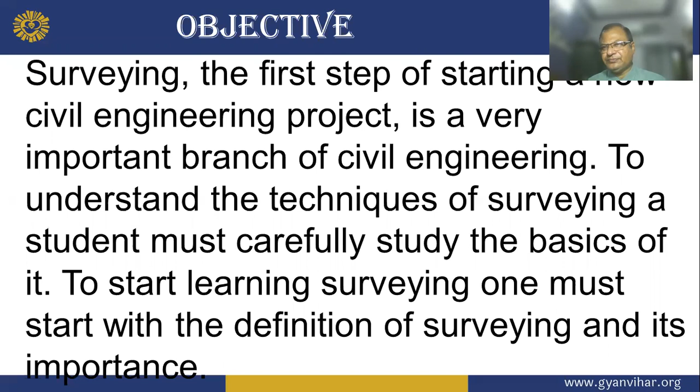Surveying is the technique of determining the relative position of different features on, above or beneath the surface of the earth, by means of direct and indirect measurement, and finally representing them on a sheet of paper known as plan or map. According to the American Congress on Surveying and Mapping,

surveying is a science and art of making all essential measurements to determine the relative position of points or physical and cultural details above, on, or beneath the surface of the earth and to depict them in usable form, or the establishment of the position of points of detail.

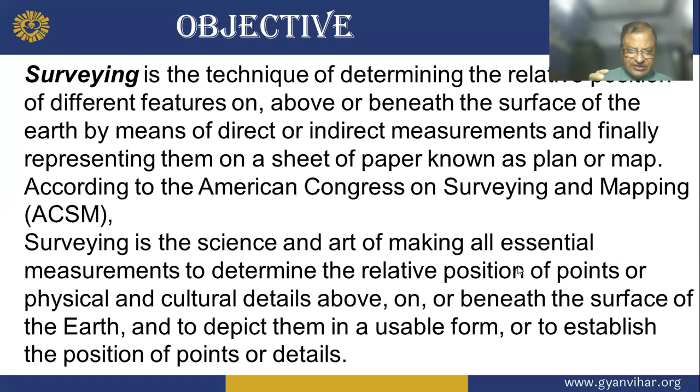The planning and design of all civil engineering projects, such as construction of highways, bridges, tunnels, dams, etc., are based upon surveying measurements. Moreover, during execution, projects of any magnitude are constructed along the lines and points established by surveying. Thus, surveying is the basic requirement for all civil engineering projects.

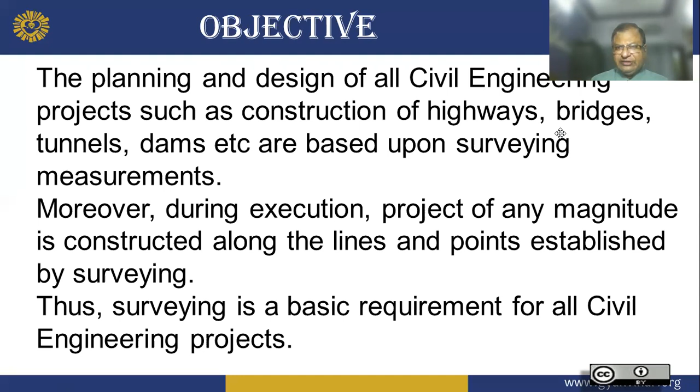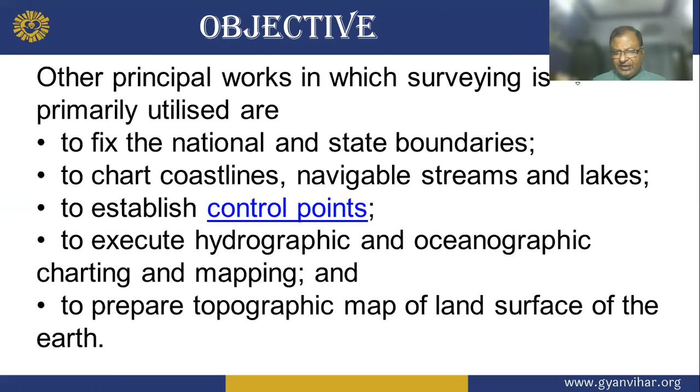Other principal work in which surveying is primarily utilized: to fix the national and state boundaries, to chart coastlines, navigable streams and lakes, to establish control points, to execute hydrographic and oceanographic charting and mapping, etc., and to prepare the topographic map of land and surface of the earth.

So dear boy, now we will see introduction of survey. First we will see the definition. Surveying is the science and art of the determination of the relative position of points above, on, or beneath the earth's surface and locating the points in the field.

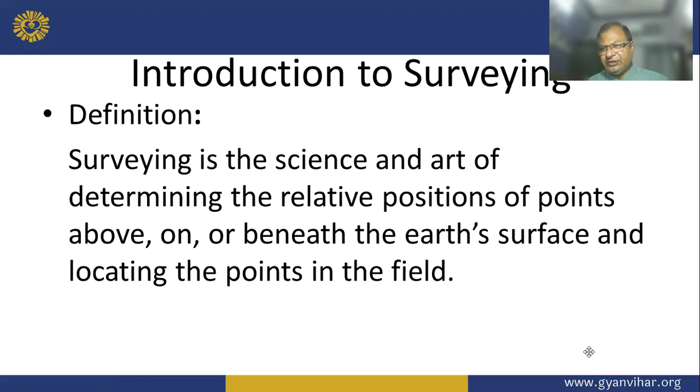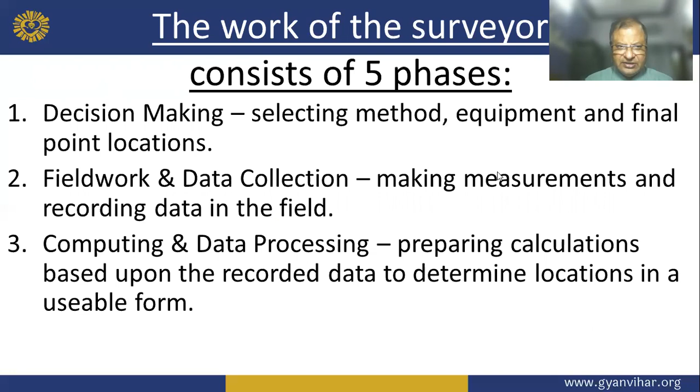The work of the surveyor consists of 5 phases: decision making, selecting method, equipment, and final point location; field work and data collection, making measurements and recording data in the field; computing and data processing, preparing calculations based upon the recorded data to determine location in a usable form.

The work of the surveyor consists of 5 phases. 4. Mapping or data representation, plotting data to produce a map, plot or chart of proper form, and stake out, locating and establishing monuments or stakes in the proper location in the field.

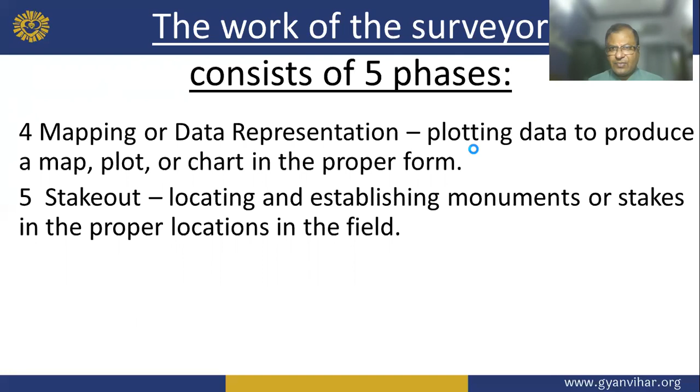So the primary object of the survey is the preparation of plan of estate or building, road, railway, pipeline, canal, etc., or to measure the field, state, nation. Object of a geodetic survey is to determine the precise position on the surface of the earth of widely distant points.

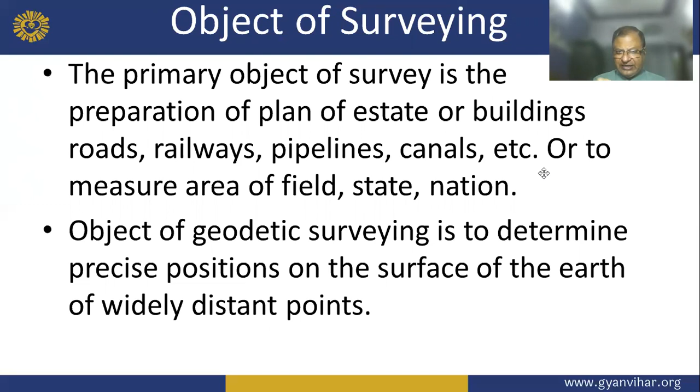To prepare a topographic map, this shows the hills, valleys, rivers, villages, towns, etc. of a country. To prepare a cadastral map showing the boundary of the fields, houses, and other properties. To prepare an engineering map to show details like road, railway, canal, etc.

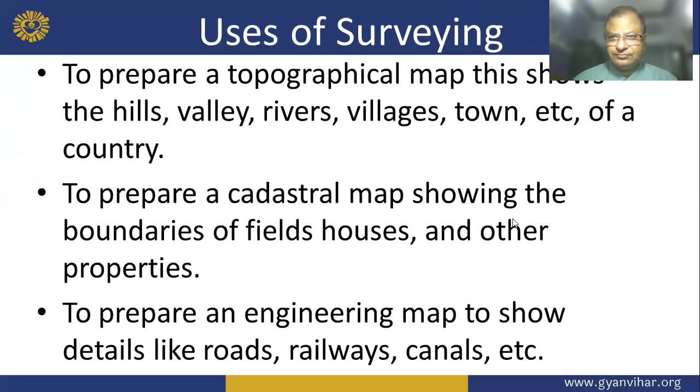Now, use of surveying to prepare military maps showing road and railway communication with different parts of the country. To prepare contour maps and determine the capacity of reservoirs and find the best possible route for roads and railways, etc. Now you will see what is the contour map and what is the reservoir map.

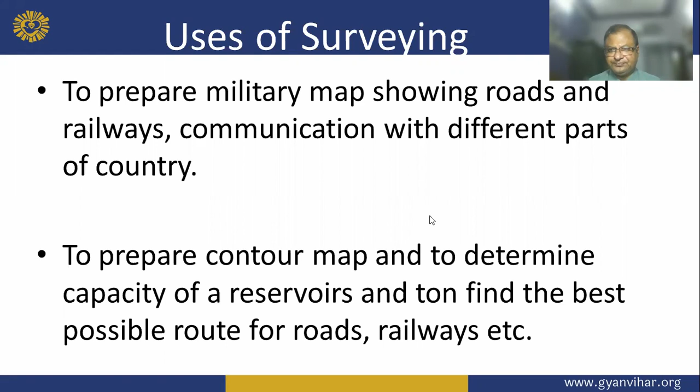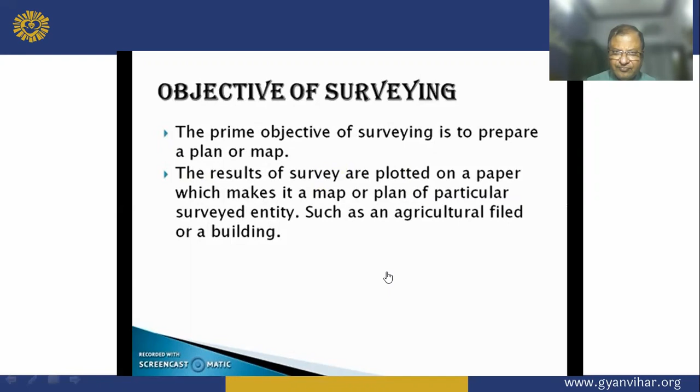Now, classification of survey. Survey may be classified in various ways: based on the nature of the field of survey, based on the objective of the survey, based on the method of survey, and based on the instrument used for survey. If you are making a field type survey - the farmer's field, the houses of farmers, the houses of a village - you can make it easily based on the objective of survey. If you want to plot all the objectives, you can show that. If you want to plan, it can be based on the method of survey, and based on the instrumentation used for survey, depending on which instrument you are using.

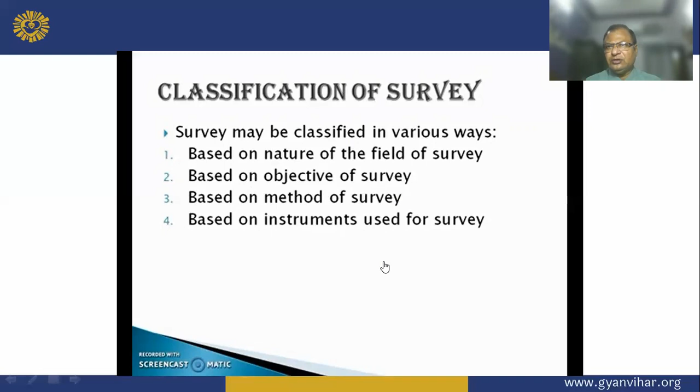Now, type of survey classification. First, the primary classification or primary division: plane survey and geodetic survey.

So what is plane survey? If here is an area, and in this area so many features are available - a river, a road, an entire road, and here is an important workshop - so all these are plane survey.

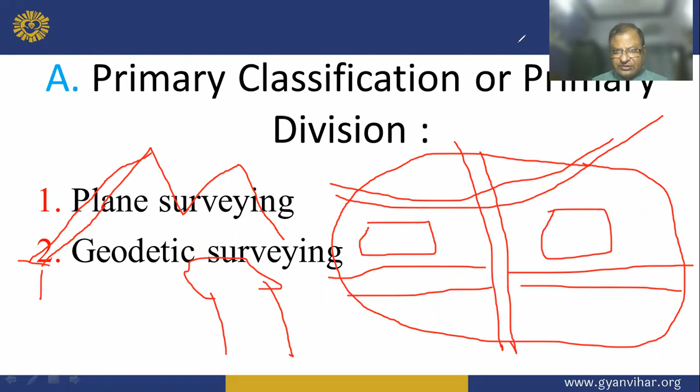But when you do a survey here, and here some mountains are available, here a tree is available, if you take one height from here and a second height from the top of the mountain, or one height from the bottom of the tree and a second from the top of the tree, this is called geodetic survey. It means where elevation has been entered in the survey, that is called geodetic survey.

So what is the definition? The shape of the earth is spherical, thus the surface is obviously curved. But in plane survey, the curvature of the earth is not taken into account. Just wait - my earth is like this. If you are doing a survey here, you cannot feel the earth is curved. If you do a survey of around 25 kilometers, then you will feel the earth has curved.

So the shape of the earth is spherical. The earth's surface is obviously curved, but in plane surveying the curvature of the earth is not taken into account. This is because plane surveying is carried out over a small area, so the surface of the earth is considered as a plane. The degree of accuracy required in this type of surveying is completely low. Plane surveying is done in areas of less than 250 square kilometers.

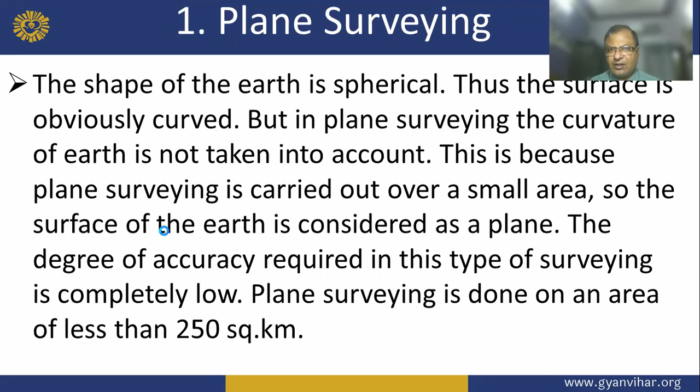In geodetic survey, the curvature of the earth is taken into consideration. It is extended over a large area, greater than 250 square kilometers. The line joining any two points is considered a curved line. Very refined methods and instruments are used in this type of surveying. In this method, very high precision and accuracy are required.

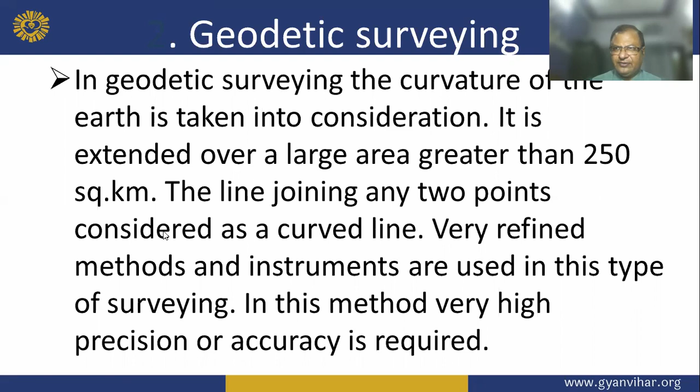In my previous class, you have seen how we are doing chain survey.

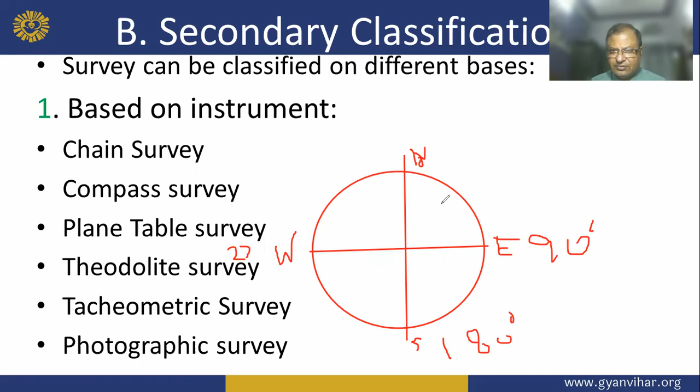Now, what is the plane table survey? If you are going in the field and you have work on a plane table, the entire work you do there is called plane table survey.

Theodolite survey is a version where you can take the horizontal axis, because a level can take only horizontal, but theodolite can take vertical survey too.

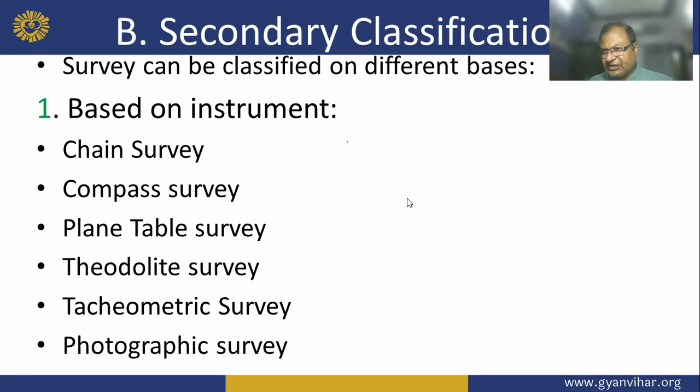So this is the photographic survey, that is the aerial survey. Triangulation survey and traverse survey. Geological survey, mine survey, archaeological survey, and military survey. Land survey, marine survey, astronomical survey.

Now, other types of survey are also available. Photogrammetry: mapping utilizing data obtained by the camera or other sensor carried by airplane or satellite. Boundary survey: establishment of property corners, boundaries, and area of the land parcels.

Control surveying: establishment of a network of horizontal and vertical monuments that serve as a reference framework for other survey projects. Or engineering survey: providing points and elevations for building and civil engineering projects.

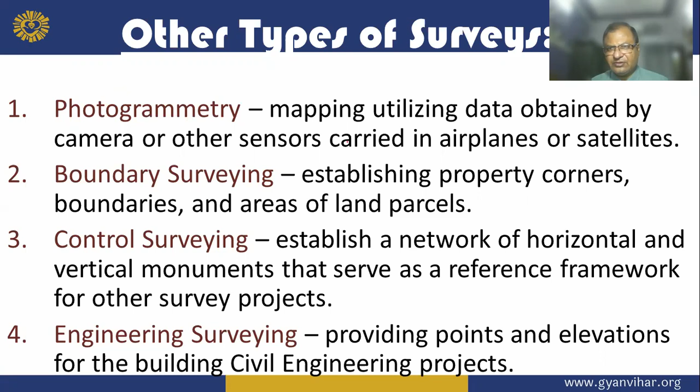So other type of survey: topographical survey, collecting data and preparing maps showing the location of natural and man-made features and elevation of points on the ground for multiple uses.

Route survey: topographical survey for long and narrow projects associated with civil engineering, such as highway, rail road, pipelines and transmission lines.

Hydrographic survey: mapping of the shoreline and bottom of a body of water, also known as bathymetric survey. The condition is, suppose this is the feature of earth, all filled with water. This is the sea. So all features you should survey and you will map the position of the earth's features, that is called hydrographic survey.

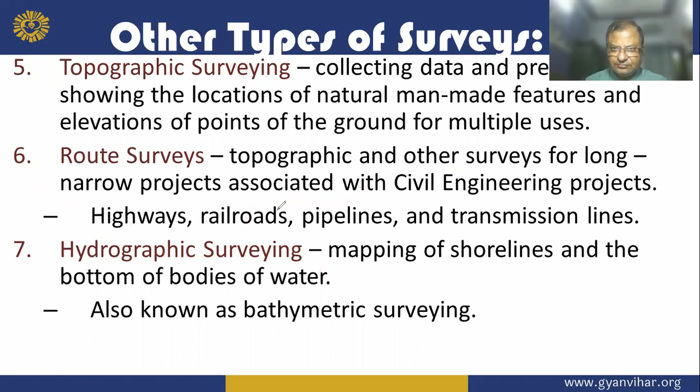Now, brief history of surveying. Surveying had its beginning in Egypt about 1400 BC.

Land along the Nile River was divided for taxation, and divisions were washed away by the annual floods. Rope stretchers, Egyptian surveyors, recreated and relocated the land divisions. Measurements were made with rope having knots as units of distance.

Extensive use of surveying in building Egyptian monuments, and Greek expansion of Egyptian work developed geometry. The pyramids are an example of this. They developed one of the earliest surveying instruments, the diopter, a form of level.

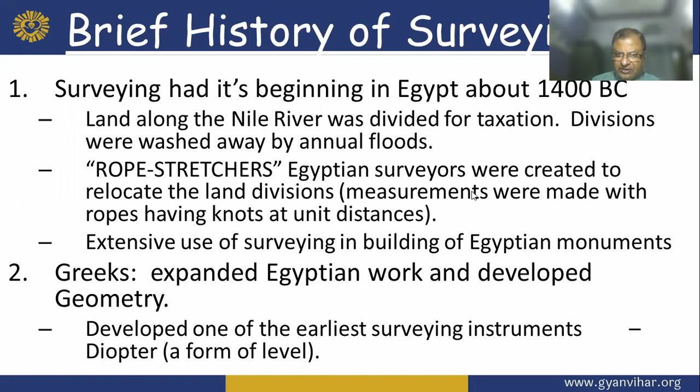The Romans developed surveying into a science to create Roman roads, aqueducts, and land division systems. So surveyors had great power, had a school and professional organization.

So they developed several instruments like the groma, a cross instrument used to determine a line at right angles, and the libella, an A frame with a plumb bob used for leveling, the chorobates, a 20-foot straight edge with oil in notches for leveling.

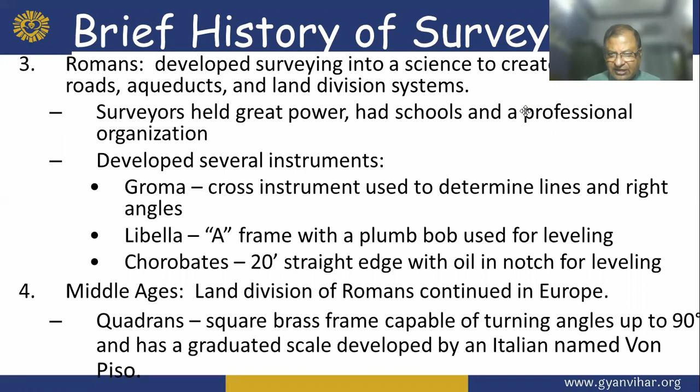Land division of the Romans continued in Europe, so the quadrans, a square brass frame capable of turning angles up to 90 degrees and having a graduated scale, was developed by an Italian named Von Piso.

So, brief history of surveying continued. My dear boy, in the 18th and 19th century in the New World, the need for mapping and marking land claims caused extensive surveying, especially by the English.

Now, in 1785, the United States began extensive survey of public land in one mile square sections. So 30 states surveyed under the US public lands survey, also called the rectangular system.

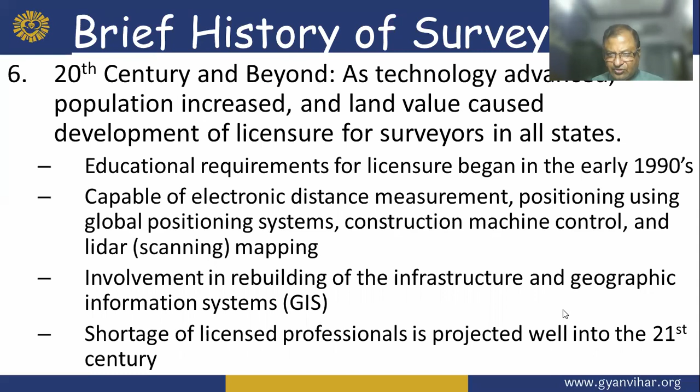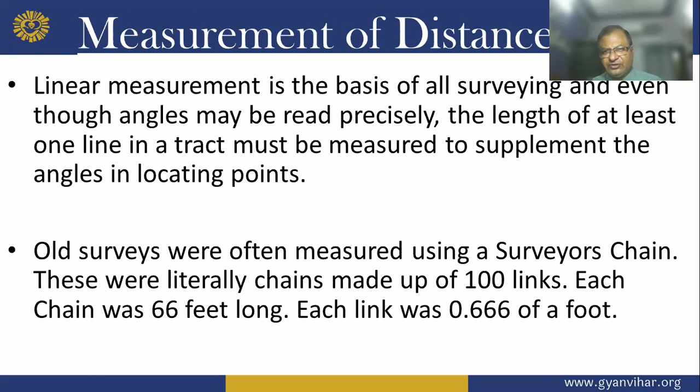Now, acre: the English acre is a unit of area equal to 43,560 square feet, or 10 square chains. A square mile is 640 acres. The Scottish acre is 1.27 English acres.

Chain: a unit of length usually understood to be the Gunter chain, formed of heavy metal chain of 100 links, that was used by surveyors to measure property.

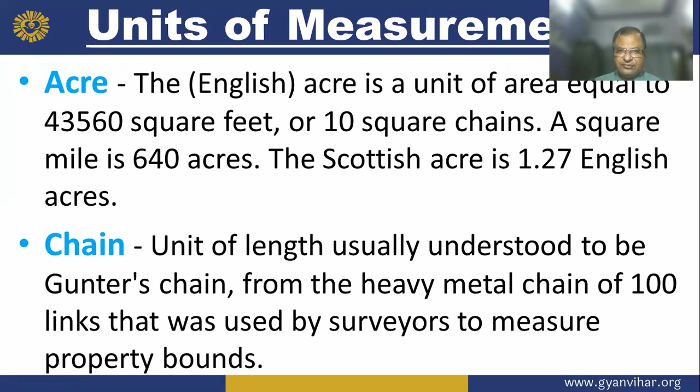Now, what is the hectare? A metric unit of area equal to 10,000 square meters, or 2.471 acres.

So link: a unit of length equal to 1/100 of a chain, so 7.92 inches. And rood: a unit of area usually equal to 1/4 acre.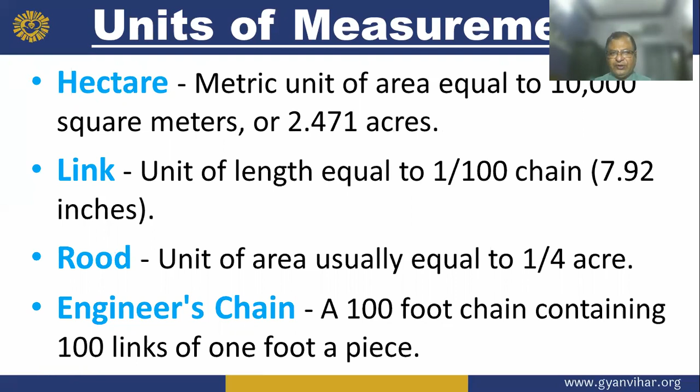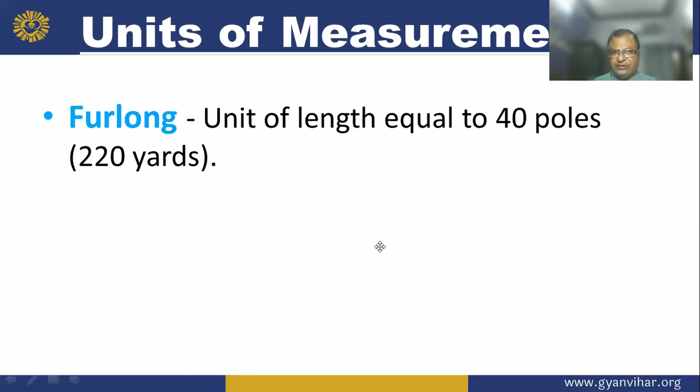Engineer chain: a 100-foot chain containing 100 links of 1 foot apiece. And this is the furlong, a unit of length equal to 40 poles, that is 220 yards, called a furlong.

A direct method of measurement, when a pupil moves around alone, that is called measurement of distance by pacing. Mainly it is counted as about 80 centimeters distance per pace of each person.

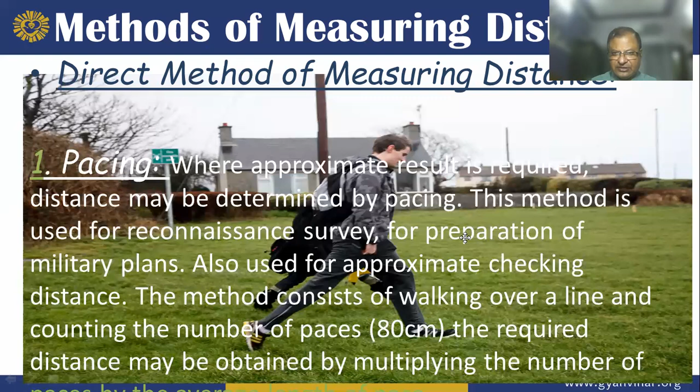So, method of measuring distance: the length of a pace varies with the individual's age, height and physical condition, the nature of the ground, uphill and downhill, the slope of the country, and the speed of pacing.

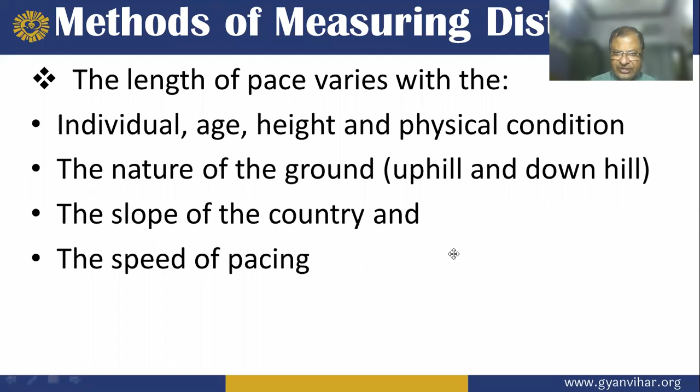This is the passometer. It is a pocket instrument. It automatically records the number of paces. It should be carried vertically in a waistcoat pocket or suspended from a button.

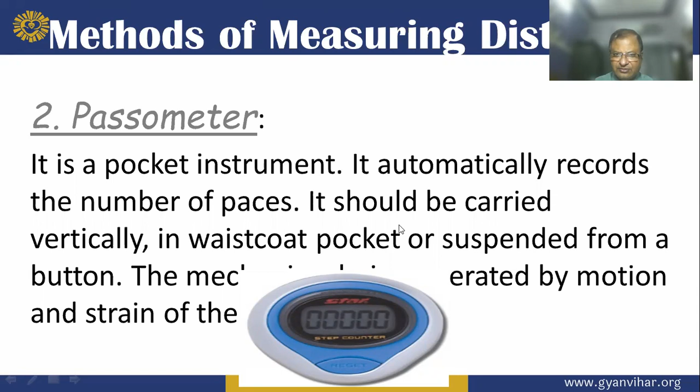It is operated by the motion and strain of the step. This is the pedometer. You can carry it at the waist or on the foot also.

It is similar to the passometer, but it registers the distance walked by the person carrying it. The distance is read by means of an indicator fitted with a stud or knob, which, when pressed, resets the indicator to zero. It may be carried in the same way as the passometer.

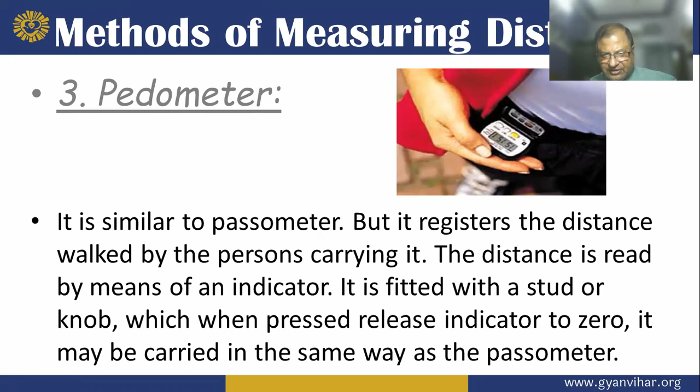This is also a measuring instrument, the car or motorcycle speedometer. From this, you can easily measure the distance and how much speed.

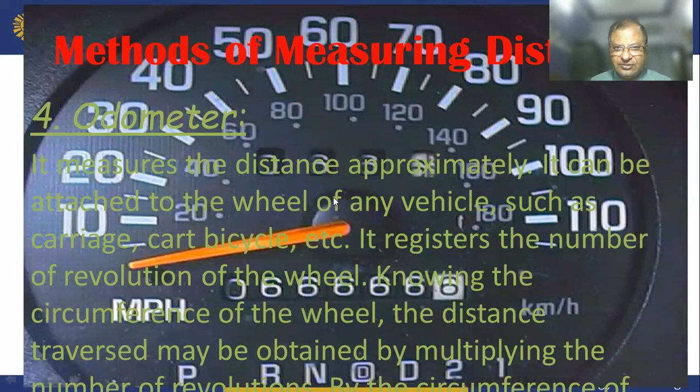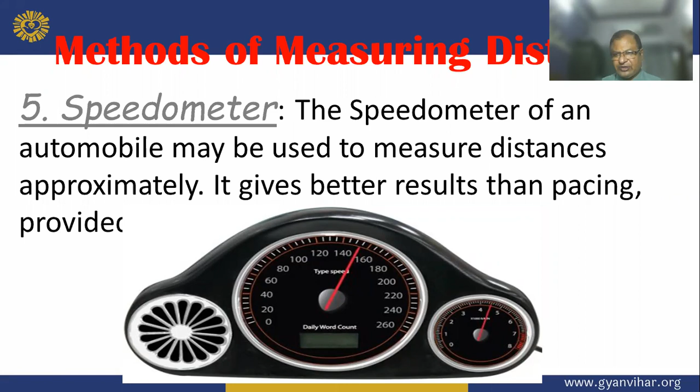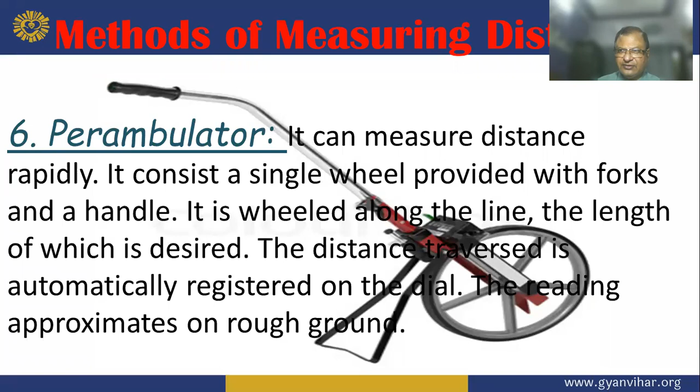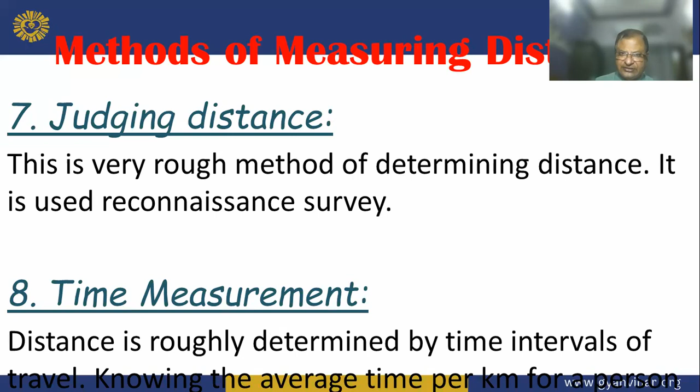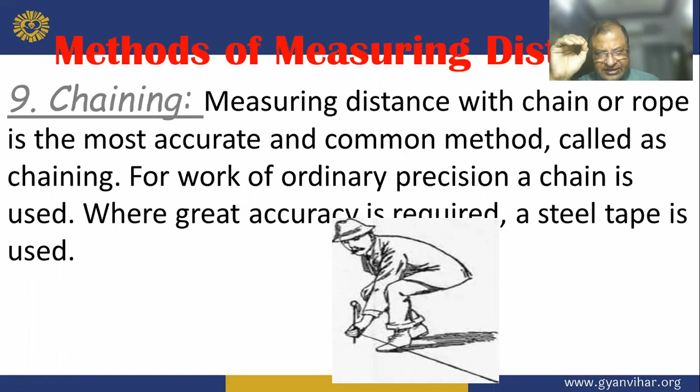Now, method of measuring distance: next, chaining, measuring distance with the chain or rope, the most common method, called chaining for work. If ordinary precision is needed, a chain is used; where great accuracy is required, a steel tape is used.

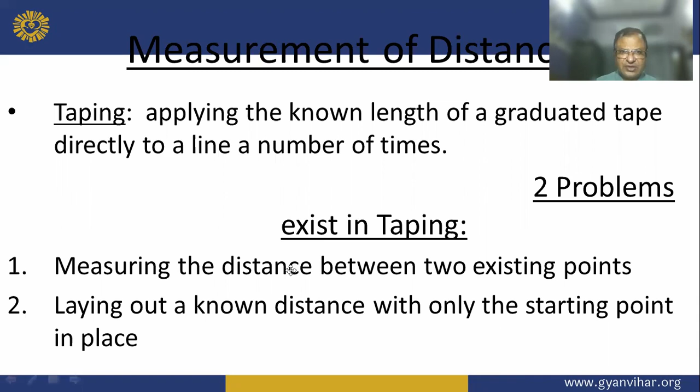The measuring of distance: now, taping, applying the known length of the graduated tape directly to a line a number of times, problems exist in taping, so measuring the distance between two existing points and laying out a known distance from the starting point. This is the measurement of distance.

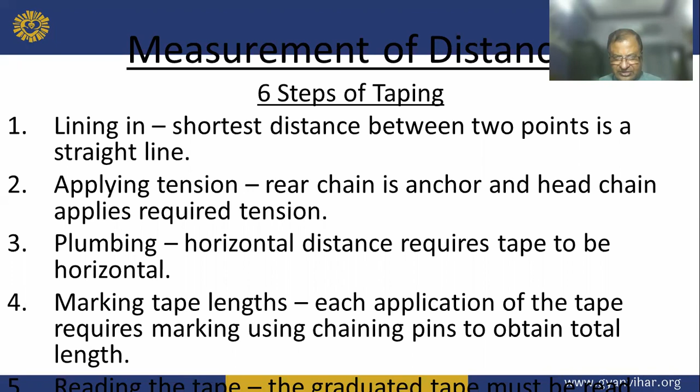So the steps of taping: first, lining in the shortest distance between two points is a straight line. Second, applying tension, with a rear chainman anchoring the lead chainman applying the required tension. Third, plumbing: horizontal distance requires the tape to be horizontal and marking the tape length. Each application of the tape requires marking, using chaining pins for the total length.

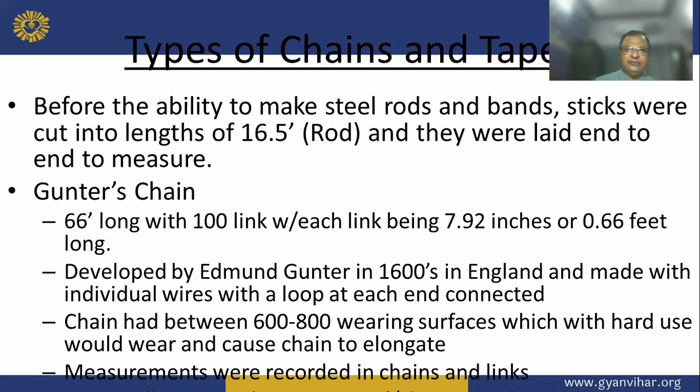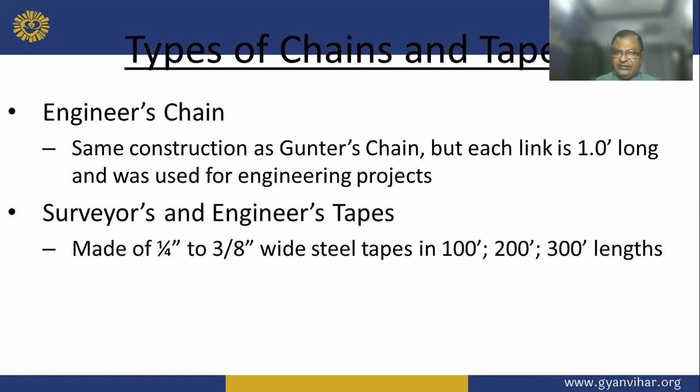Now, engineer's chain. Same construction as the Gunter chain, but each link is 1.0 foot long and it was used in engineering projects. Surveyor's and engineer's tape: made from 1/4 inch to 3/8 inch wide steel tape in 100 foot, 200 and 300 foot lengths.

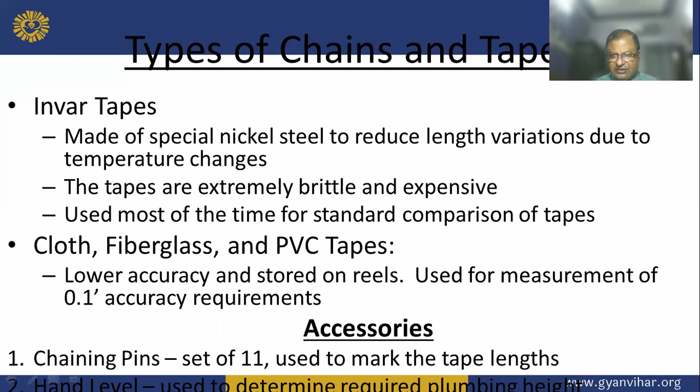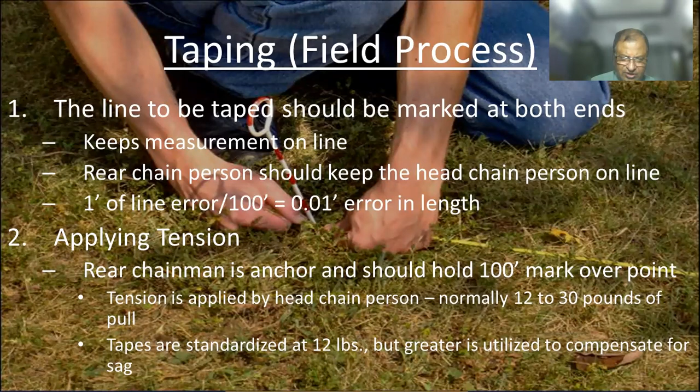Now, applying the tension. The rear chainman is the anchor and should hold the 100 mark over the point. Tension is applied by the head chain person, normally 12 to 30 pounds of pull. Now this is plumbing. It is taken in hand. One end of the tape is raised to maintain the horizontal measurement, only one end is elevated.

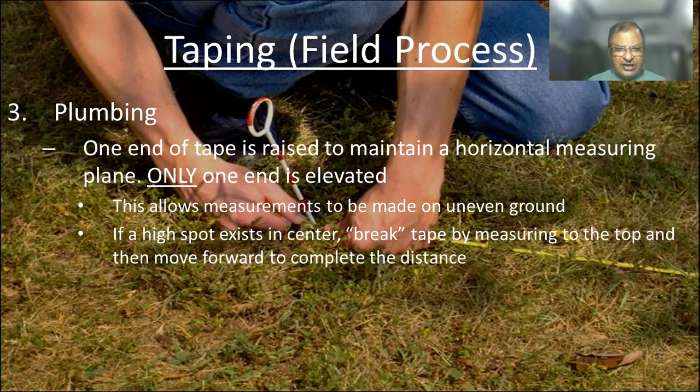So it allows measurements to be made on uneven ground. And if the high part is at the center when measuring, tape to the top and move forward to complete the distance.

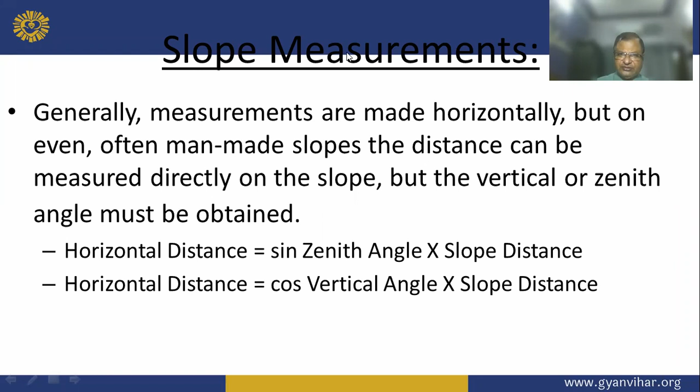Now generally measurements are made horizontally, but on uneven or man-made slopes, the distance can be measured directly on the slope, but the vertical or zenith angle must be obtained. So horizontal distance is equal to sine of zenith angle times slope distance, and horizontal distance is equal to cos of vertical angle times slope distance. Now, my dear boy, this is the taping error.

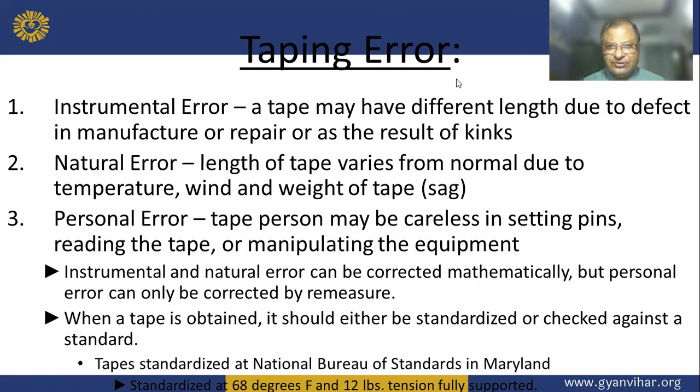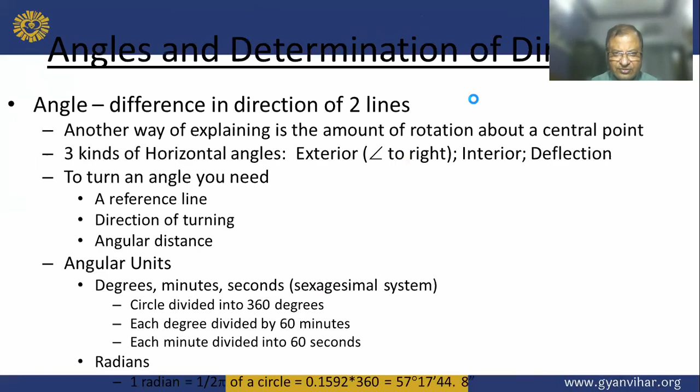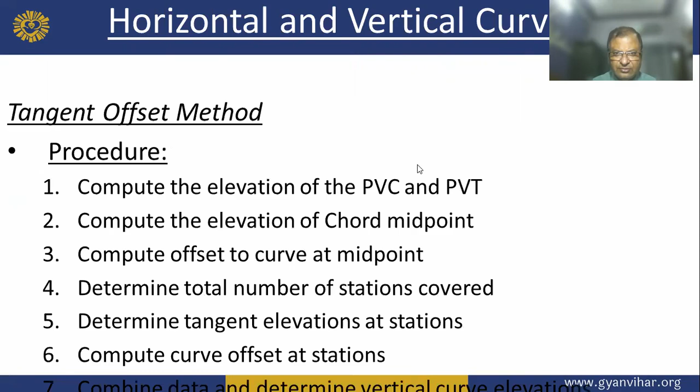So I think you have read sufficient for today's class. I want to ask some MCQs from you. So we are moving to MCQs. I'm just reaching the MCQs.